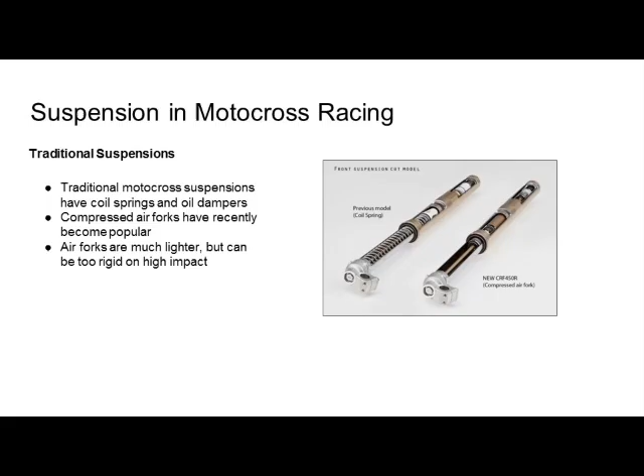Traditionally, suspensions in motocross racing have simply consisted of coil springs and oil dampers. This system has worked well over the years, but coil springs are very heavy, which slow down the bike's rebound speed, and they do not allow riders to adjust the response of their bike for different track conditions. For these reasons, compressed air forks have recently become popular, but they have not been widely accepted because they are too rigid on high impact and aren't very durable.

Last year, Showa released a new design that consists of 3 air chambers in one side of the fork and an oil damper in the other side of the fork. This makes the suspension system highly adjustable, durable, and responsive at different levels of impact. One of the chambers is inside of an outer chamber to maintain suspensions even if a seal blows, and the other chamber sits underneath and counteracts the downward force of the other 2 chambers, preventing the fork from topping out.

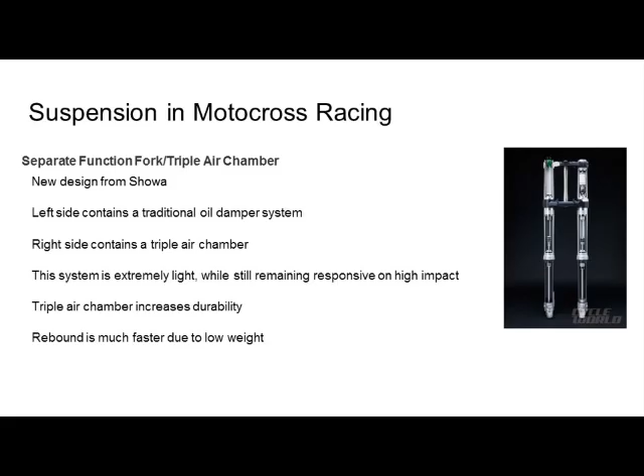The low weight of this system also increases the rebound speed, allowing the rider to quickly recover from impact. The fork also allows not only adjustment of the damping effects, but also of the pressure in all 3 air chambers, making the response and ride of the fork customizable to any rider's needs.

The suspension travel describes how much the wheel of the motorcycle is able to move up and down. The terrain that the motorcycle will be driven on is the biggest factor to consider when designing the suspension travel. The first objective is to have as smooth of a ride as possible. The second objective is to have the tires maintain contact with the terrain's surface. The dimensions of the motorcycle are one constraint to take into account. The shocks have to be short enough that a person can get onto the motorcycle.

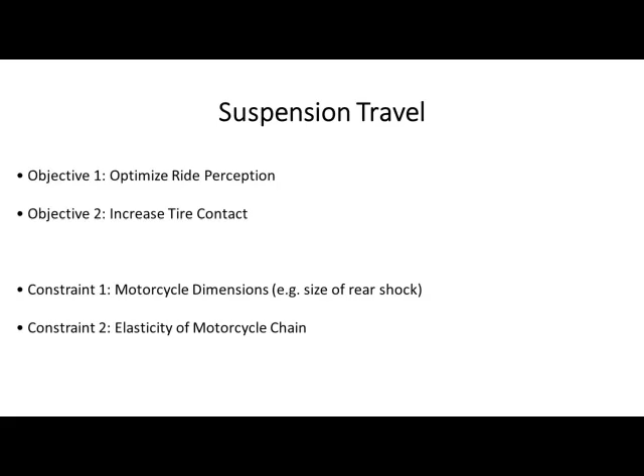The suspension travel is constrained by the chain of the motorcycle. The chain will snap if enough tension is placed on it, and it could slip off if it gets too loose as the wheel is moving up and down. Because of this, a tensioner is used on the rear wheel of the motorcycle to account for the suspension travel.

Since some motorcycles are driven on rough and smooth terrain, a rising rate suspension is used. With this suspension, the spring changes tension as it compresses. This variable stiffness of the spring in the rear shock allows motorcycles to handle rough terrain and smooth terrain.

Rebound damping refers to the speed at which the spring and fork in the suspension return to their original position. For example, a highly damped fork will return to its original position very slowly. It is important to have a balanced level of rebound damping. If rebound damping is too low or too high, there will be a loss of traction. If it's too high, the spring will fail to return to its proper position fast enough.

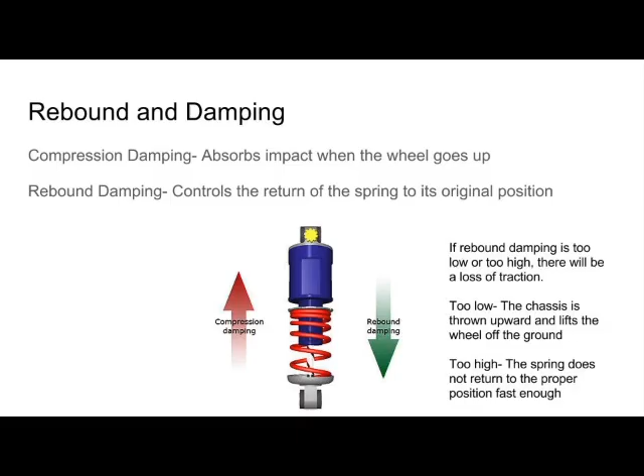If it's too low, the chassis may actually be thrown off the ground because the front fork basically becomes a pogo stick. In both cases, contact with the ground is interrupted after hitting a bump or a pothole. Having too much rebound damping is uncomfortable for the driver, and having not enough may be comfortable at low speeds, but at high speeds the driver will feel out of control. In general, the effects of compression damping are very similar to rebound damping. On most bikes, the compression and rebound damping may be adjusted manually in order to find the happy medium.

Anti-dive technologies were first engineered between the 1960s and 1980s. There were 2 main types, the Honda TRAC system and the Kawasaki AVDS system. The intended purpose of an anti-dive suspension is to keep the front suspension from depressing a long distance, otherwise known as diving, during fast deceleration. This diving of the front end can cause the rider to rotate over the handlebars, or at the very least the back wheel will lift off the ground, resulting in a loss of control or traction for an inexperienced driver.

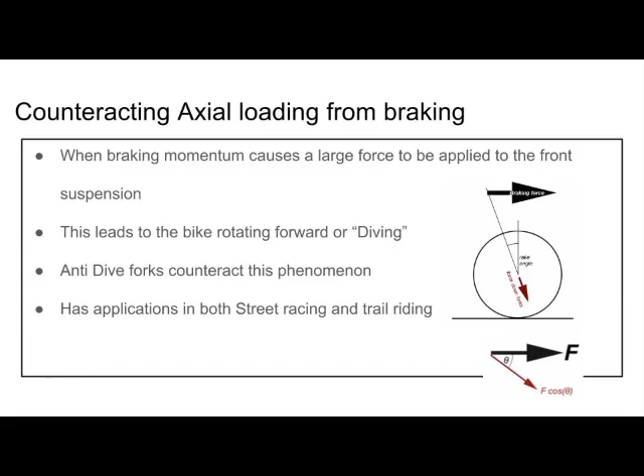The TRAC system utilized a brake caliper attached to a pivoting bar behind the center of the wheel. When the brakes were applied, the caliper rotated forward and depressed a valve that decreased the area of flow in the shocks. This increased the stiffness. The AVDS system used a third hydraulic cylinder that used the pressure built up in the brake line to compress a valve in the hydraulic cylinder that restricted the hydraulic fluid movement, stiffening the suspension.

Upside-down forks, better known as inverted forks, were incorporated by racing teams in the later part of the 1980s. To understand the benefits of inverted forks, a comparison with conventional forks is necessary. There's almost no difference between conventionally oriented forks and inverted forks in operation. The big difference between the two is their strength. Inverted forks are much more rigid because they are held by a larger diameter part of the fork called the slider. Conventional forks are mounted by the stanchion.

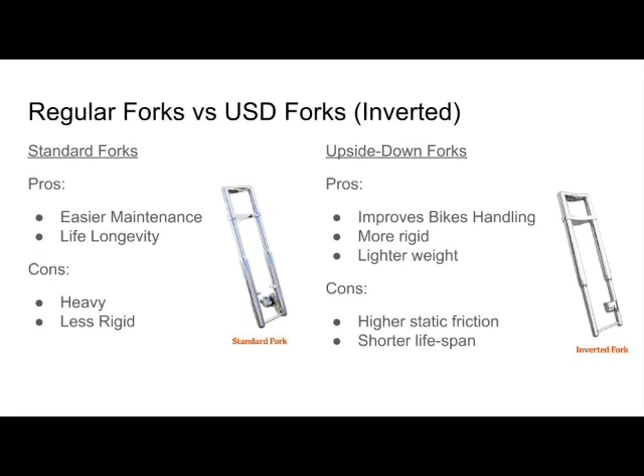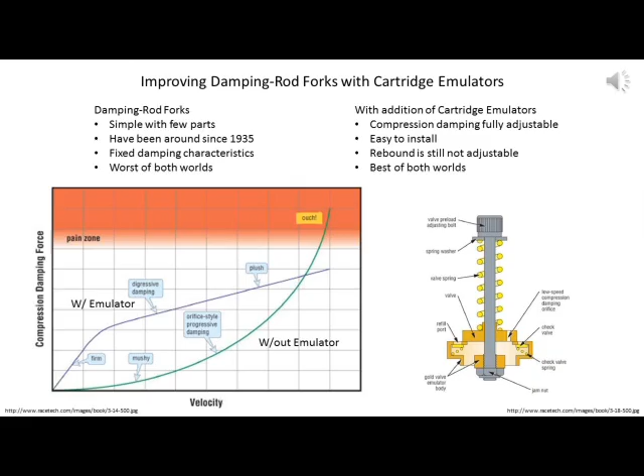By comparing the inverted and conventional forks, you will also notice the slider is much longer on the inverted forks. The slider is the more rigid portion and makes up a higher percentage of the overall length of the inverted fork. This reduces flex and improves handling and feel. Conventional forks have the advantage of requiring less maintenance and having a longer lifespan. Inverted forks tend to get damaged easier by road debris and are more difficult to repair due to their inverted structure.

The final advantage for inverted forks is their weight. The steel stanchion is the heaviest part of the fork assembly. Inverted forks have shorter and thinner walled stanchions. This directly relates to lessening of the steering inertia, which creates a more responsive feel.

I will briefly talk about cartridge emulators in damping rod forks. Traditional damping rod forks use a fork piston that has holes called orifices that regulate the compression and rebound damping. These holes are fixed in size, and as such, the fork has fixed damping characteristics. The solution is to install a cartridge emulator. These take the job of compression damping away from the fork piston by use of a sprung valve, as well as by increasing the size of the orifice holes.

This valve is shown on the bottom right. Rebound is unaffected and still unadjustable. However, the ride is greatly improved. A graph of the damping force versus the fork velocity is seen on the bottom left. The top curve is for a fork with an emulator and shows that the ride is firm and comfortable throughout the range of velocities, while the bottom curve is for a fork without an emulator and shows that the ride goes from very mushy to the pain zone.